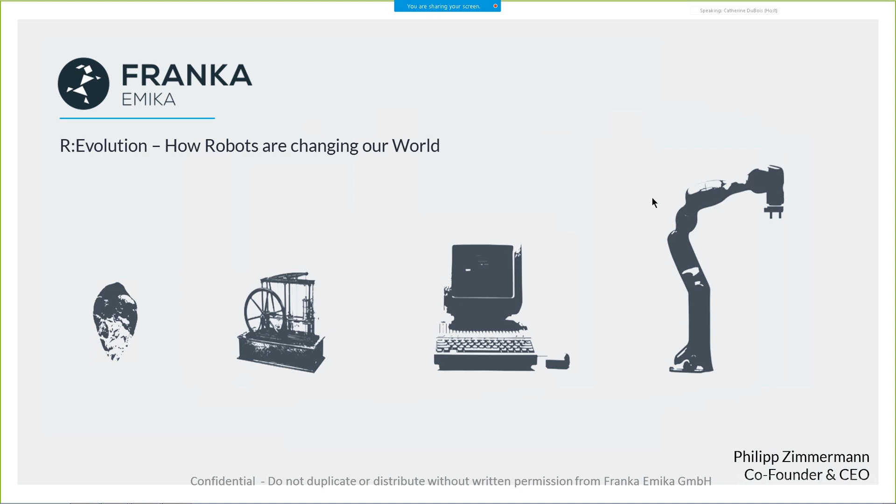And where it's going to, or at least from our point of view. To give the big picture, I like to introduce with this slide, one you've probably seen before in different presentations: mankind has always described the times in our history through the tools we've been using, starting at the Stone Age, where we used the stone pick to enhance and be more powerful and creative, and so on.

Going through the different industrial revolutions, we strongly believe that we've already entered the age of robotics. The message is that the robot should be seen as a tool to enhance and support us, rather than to replace us or be dangerous. We see the robot as a multi-power tool, so to speak, that we can use to be more powerful, to create things, art, tools, and so on.

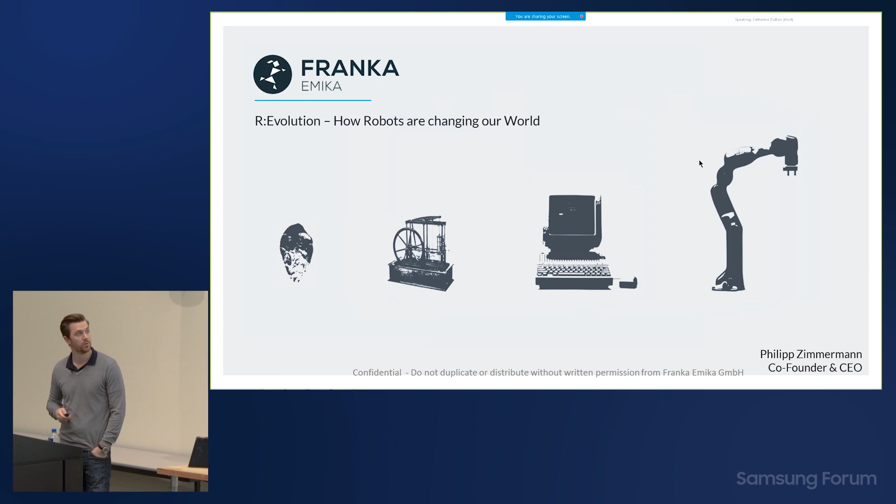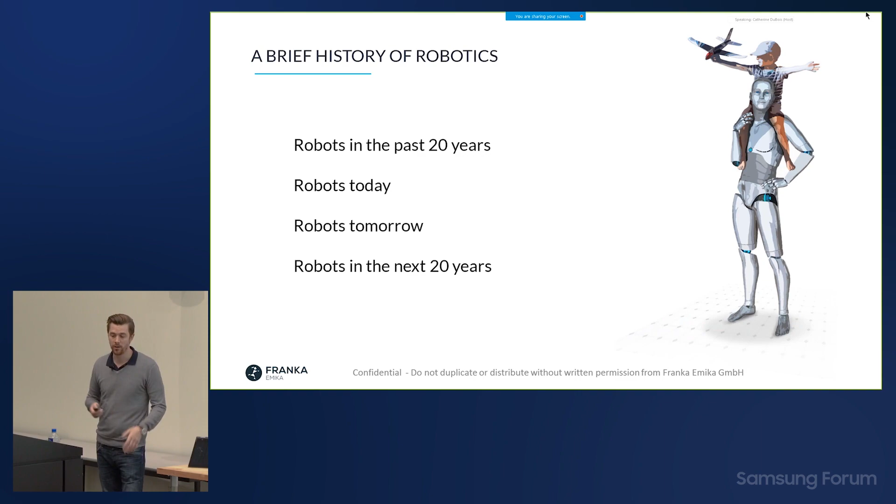So with that being said, a brief summary of what I'm going to talk about. I'll show you where robotics is coming from, what's been happening over the last years. Robots have been around for roughly 20 years, even though a lot of people haven't really seen them because they're hidden behind safety cages in big factories. Then what robots are today, where it's going towards tomorrow in the short-term, and then long-term where our goals are and where we think robots are going in the future.

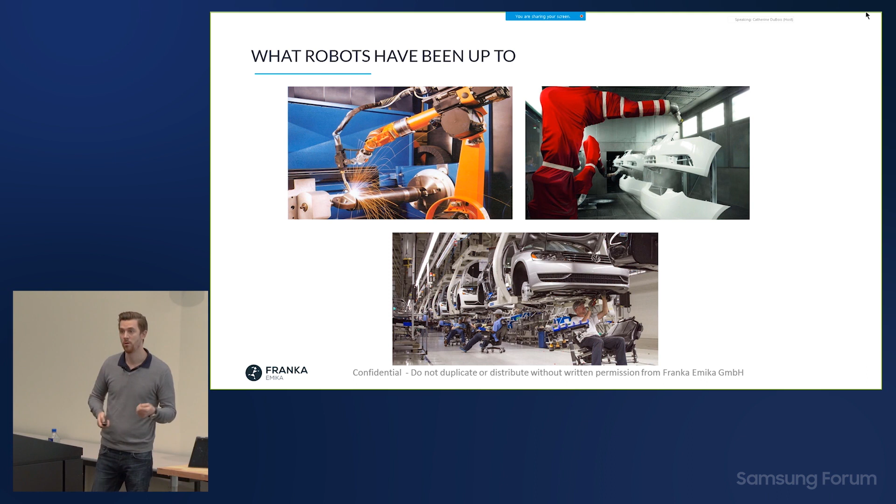So in the past, robots have really been around for 20 years, but what have they been up to? Mainly welding tasks, painting, or lifting heavy cars, stuff like that, mostly in automotive. A picture like this is what you typically see when you look into an automotive factory: lots of robots, safety fences, no humans in the areas where the robots work, and that's it.

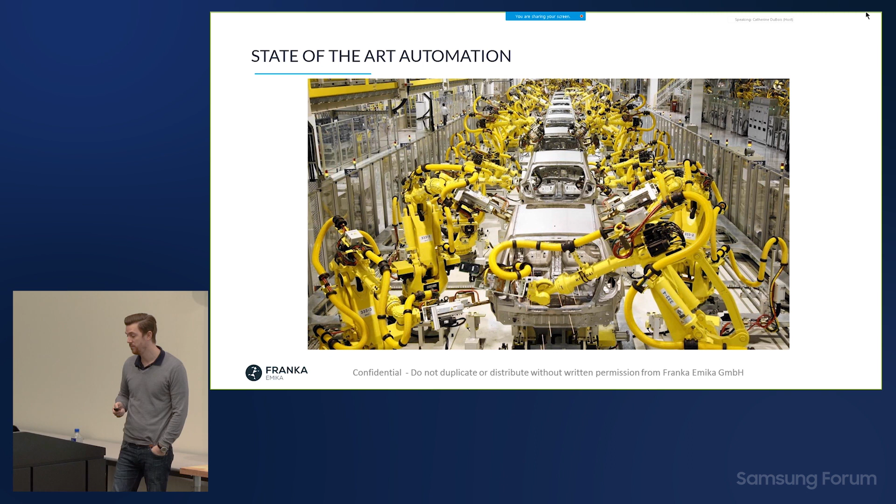The reason for that is because they're dangerous, of course. They will hurt you when you come close, so you need to protect yourself from them. And the tasks are very limited—even though we think our automobiles are mostly manufactured by robots, that's not true. Only maybe 20-30% of tasks in automotive are automated via robots, the rest is still manual labor. But these are the pictures that we see.

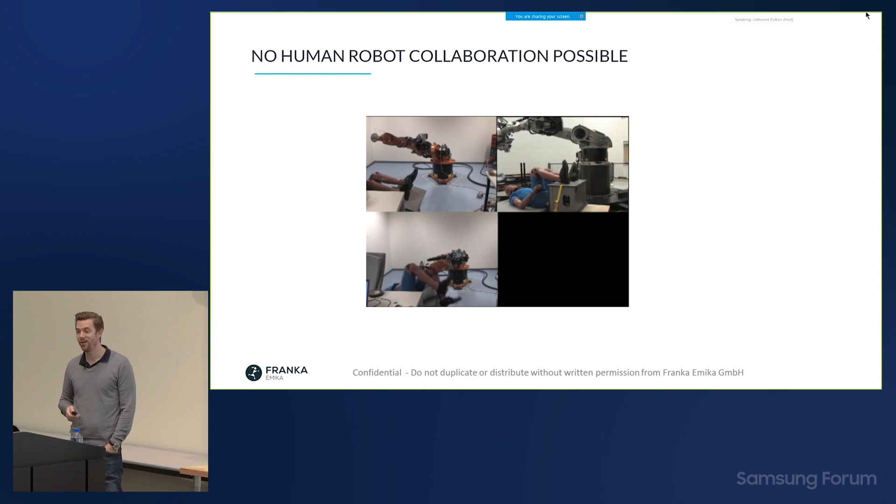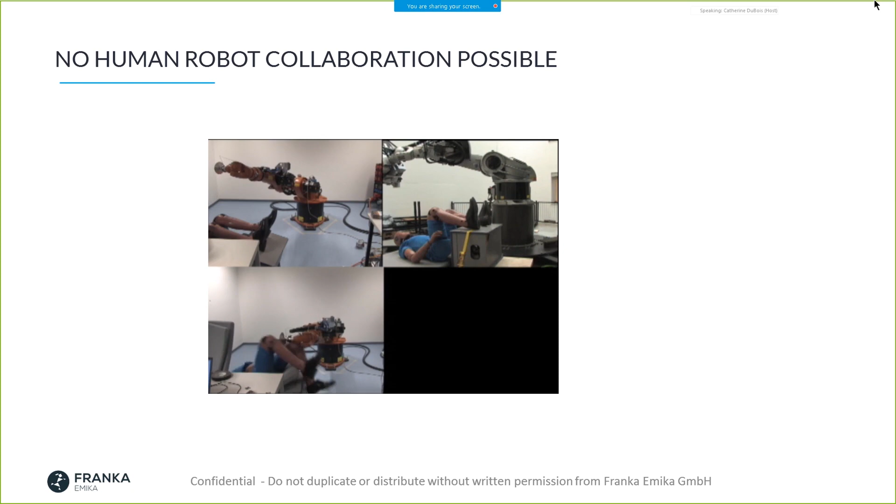Robots are dangerous, right? That's why we need safety fences, because even if we put a sensor on an industrial robot, there's no chance of survival, or at least no chance of avoiding pain. So for a long time, everybody in the world agreed robots are dangerous, period. There was no research behind that statement, it was just a fact.

Until one day, a young professor in Germany stood up and said, well, you're all wrong. Robots can be safe, and I'm going to prove it to you. He started research in this area, and we see here early videos from roughly 15 years ago, where you see a robot moving quite fast, but as soon as it detects a collision, it reacts and becomes compliant and soft.

These videos made it around the world. The whole research community screamed and said, how can you do this? This is dangerous. But it worked, and it got quite a lot of fame. People started understanding, okay, wait, maybe there's actually a way—maybe robots and humans can actually work together. Maybe robots aren't dangerous per se.

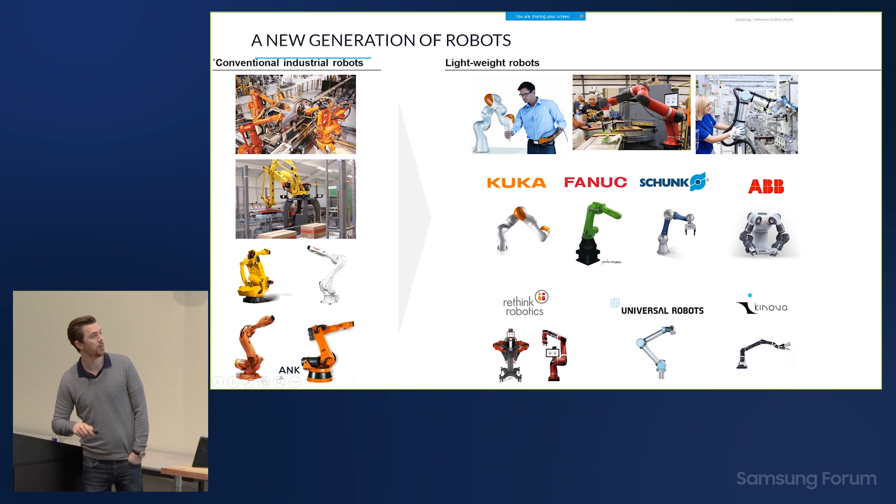Rethink Robotics, also quite successful, started solving the problem of safety, meaning once it collides with a human, it will stop. So it protects you as a human — you can work next to it and be safe. However, that's not the answer for all the problems.

If we look at robots today that we can buy for homes, those are the robots we typically see, or that's how they look. So they can tell you how you feel, or what you want to do, how the weather is tomorrow, or they can vacuum.

I don't really know what Pepper does, but it can wave and show you the way to the bathroom, or deliver things to your hotel room. But what do they all have in common? They have no arms. This robot has arms, but they're not really doing anything — they can't give you a bottle of water, they can just show you or wave to you.

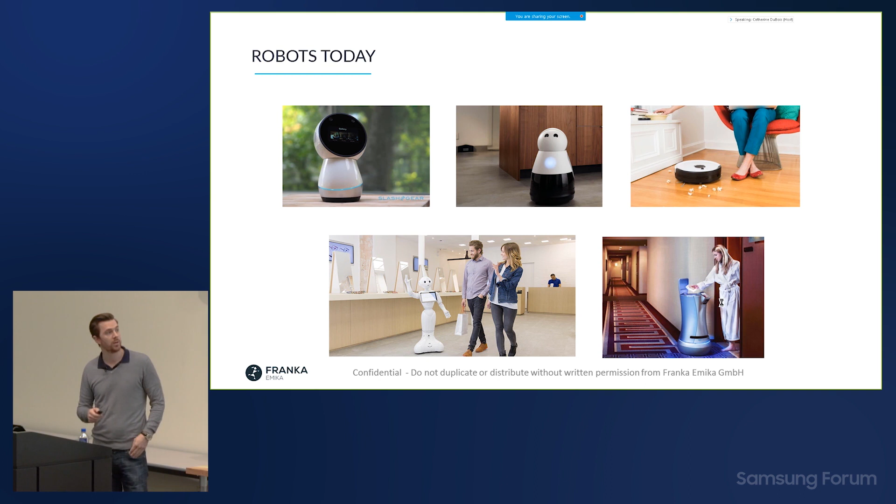And even this robot — it's a really nice robot, operational in a lot of hotels, so it will bring you your room service basically — the problem is, it can't even push the elevator button. So most hotels have elevators, and it needs to be integrated via software, which is expensive, and not all elevators are modern enough that you can do that. It would be much easier to give it an arm to press the elevator button, but apparently that's not so simple.

However, all the forecasts say big numbers, especially in the collaborative robot market. Looking at the numbers, in 2015 most robots were being sold in automotive, but over the next 10 years automotive is relatively small compared to all the other industries. That makes sense because other industries like electronics are much bigger than automotive, and hardly automated yet — people think once they have safe robots, they can sell many more.

But why hasn't that happened yet? Safe robots have been around for 5 to 10 years, but these numbers haven't been reached yet. So what is holding robots back today? Those are basically the reasons.

Besides being safe, which is obviously necessary most of all, robots are expensive. So especially for smaller companies, you really need to think hard whether you can afford a robot.

They're hardly usable, so people can't work alongside the robot. People working in the factory don't know how to operate the robot working next to it, so you need to train or hire new personnel for your company.

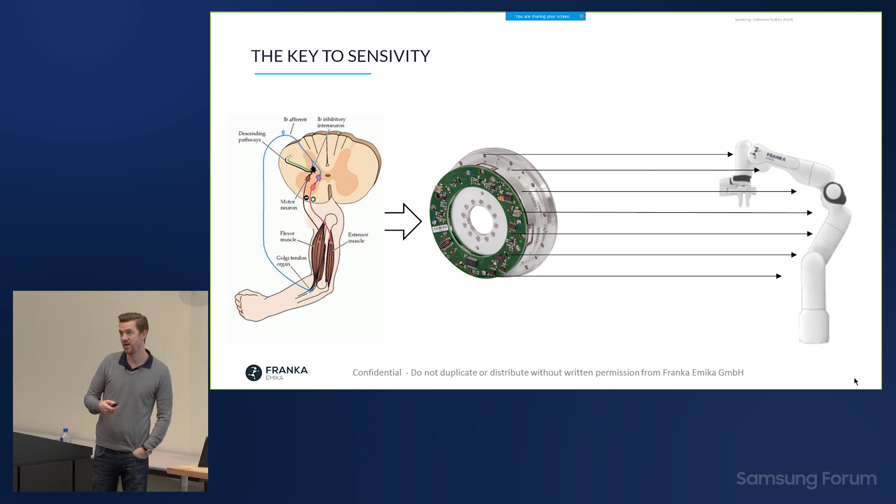That's similar to what we have inbuilt, and because it's highly integrated, the reaction time is really, really fast. We have, as humans, automatic reactions - as soon as I hit something, I can grasp it or retract. All this electronics are already in the joint itself, giving the robot a really fast reaction, making it safe enough to be around humans. Basically the requirement is you need to react faster than a human. We have about 50 milliseconds reaction time, meaning in this 50 milliseconds I'm at harm because I can't protect myself. After 50 milliseconds I'm fine because I can react. Until then, the robot needs to protect me.

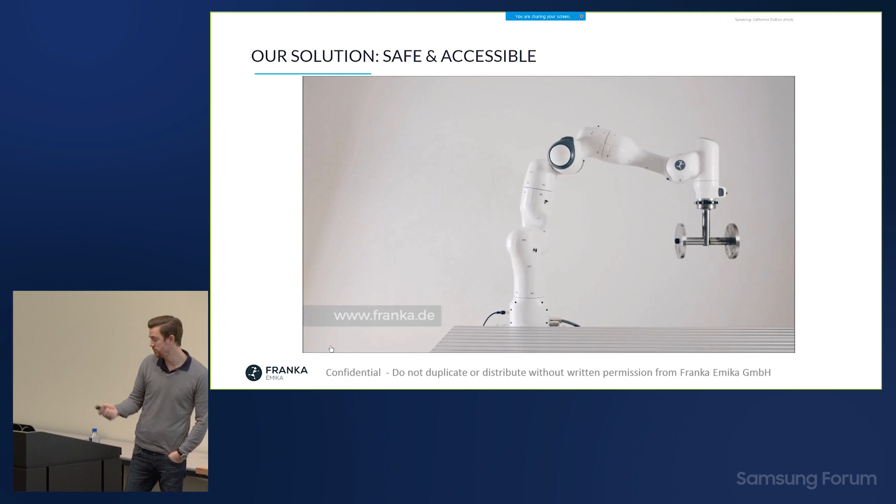So what we came up with is our robot Franka. Franka is a 7 degree of freedom robot, with a workspace very similar to a human arm, and it's as sensitive as it can be. I will demonstrate it, and I'll also invite you later to come to the front and feel it yourself to see how sensitive it is.

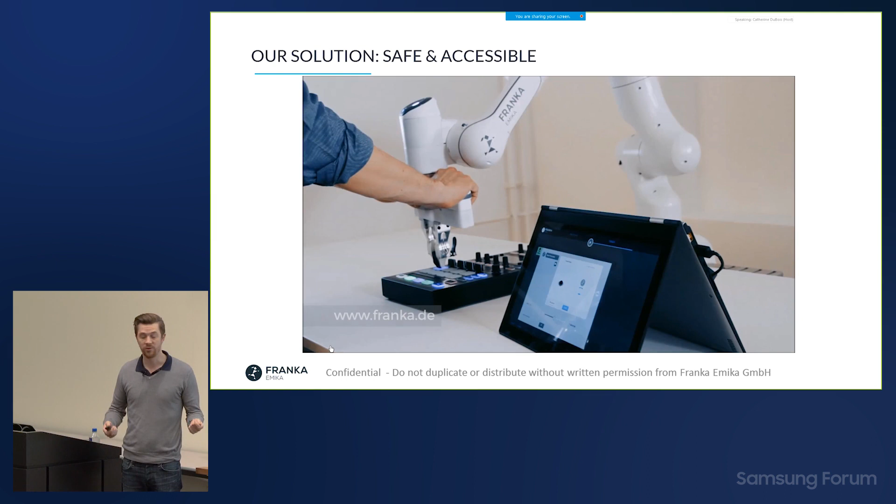The other big problem I mentioned is programming. So how can we solve that? Our approach was app-based programming - anyone can click a few apps together, like we do on our smartphones, and program a robot. And this behavior allows it to actually do assembly tasks.

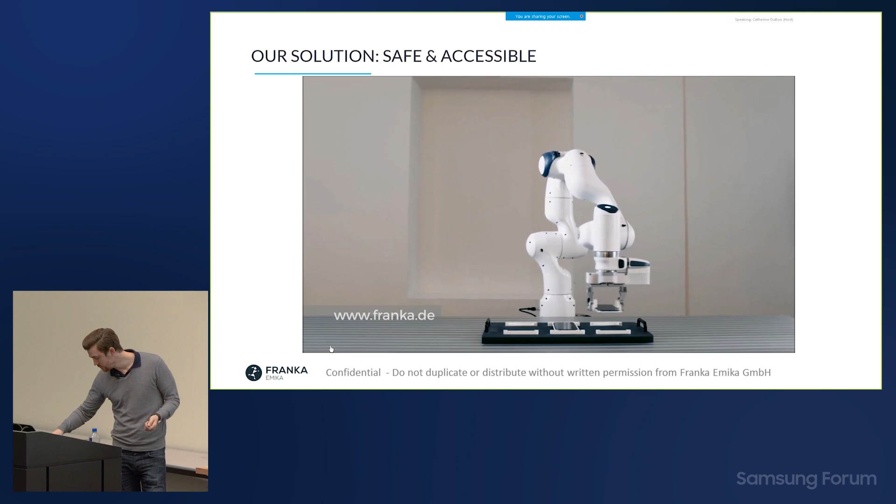So the story being told in the video here is actually the engineer programming two robots to build itself. Okay, I'll wait.

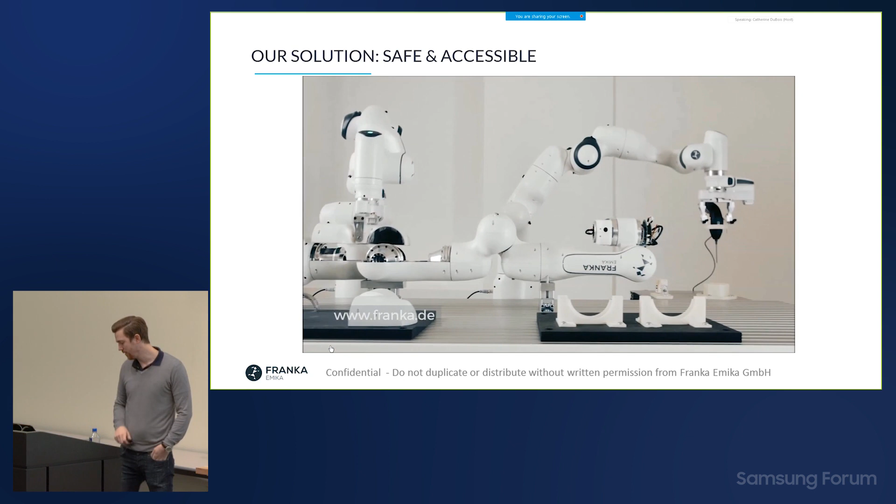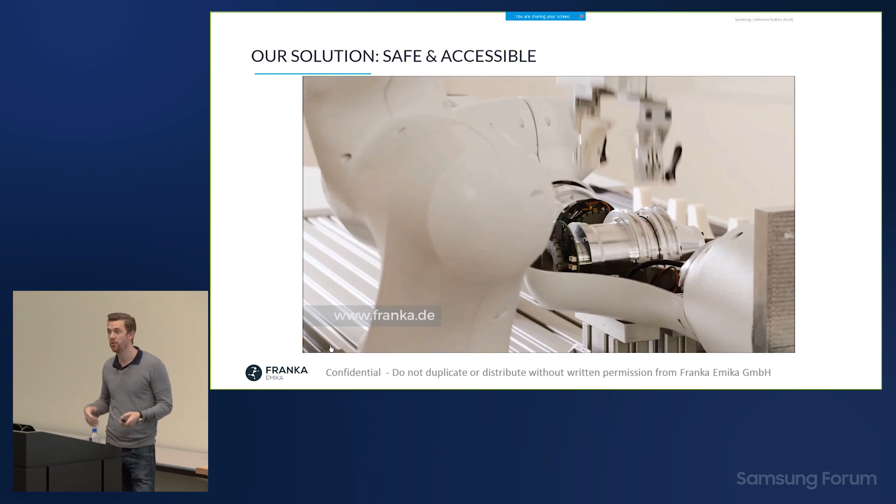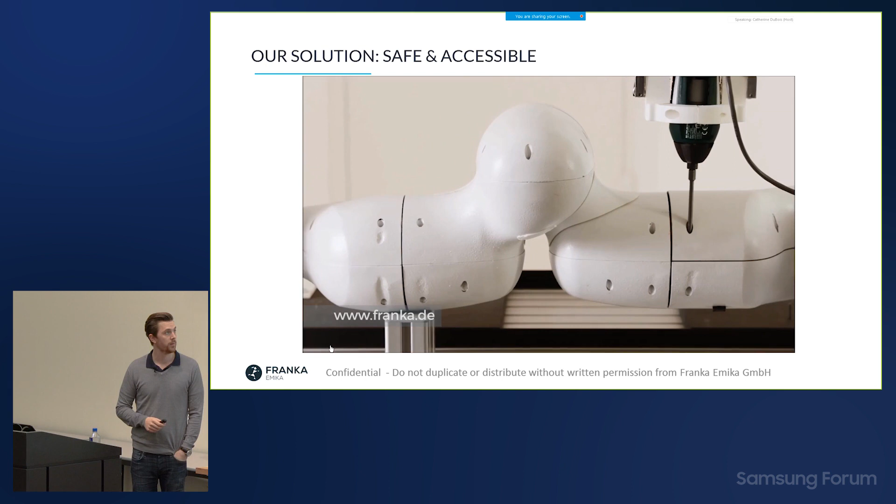So the story here is that the engineer programs two robots to build itself, to assemble itself. And that's actually not a marketing gag, that's our own production. Our production is in Germany, we're a German-based company, and the production looks like that: robots assembling robots. It would be a joke if we wouldn't do it because we claim that's the first robot to do assembly, so why wouldn't we use it in our own assembly lines?

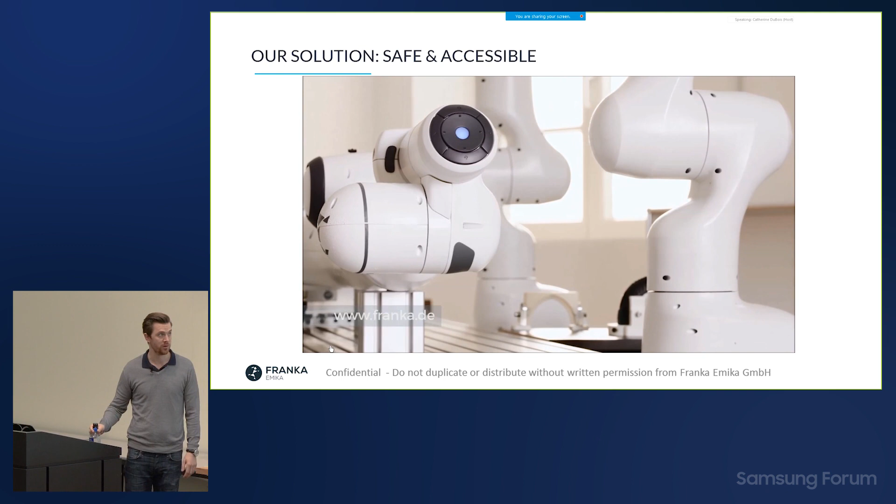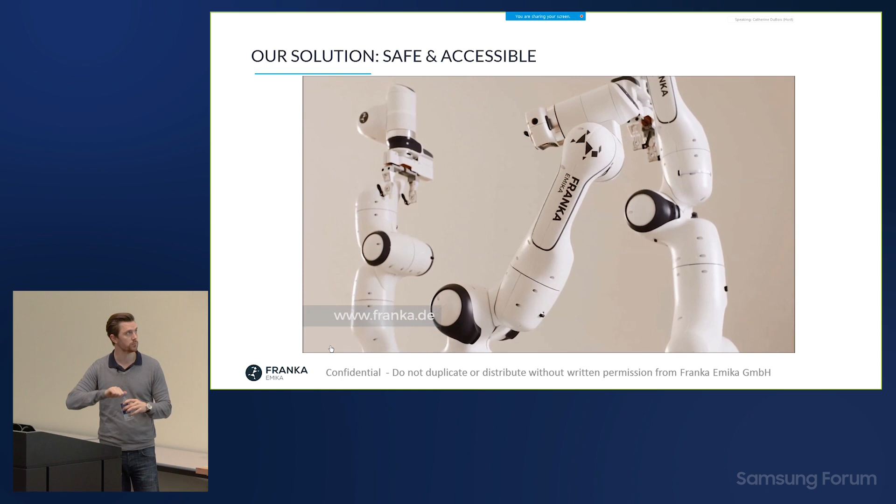The next thing is scalability. Programming one robot is fine, but you want to program hundreds and thousands of robots, maybe doing the same or similar tasks. So our robot is connected to the cloud. You program one robot and you can distribute it to as many robots as you want, no matter where they are in the world. And you instantaneously have the exact same robot program and thus the exact same quality of production, no matter where you are.

Additionally, of course, you have all the data in the cloud as well. So in total, you have a robot that is easy to program, flexible, and reprogrammable. It has an agile workspace like a human arm, and it's connected to the cloud. So you can set it up within minutes rather than months, and you can program a thousand robots at a time, no matter where they are in the world. And being in the cloud, obviously you have all the data in the cloud.

You can put any additional intelligence like artificial intelligence on top of it. So you can let them learn from each other. You can do predictive maintenance. You can make them optimize each other, all these things.

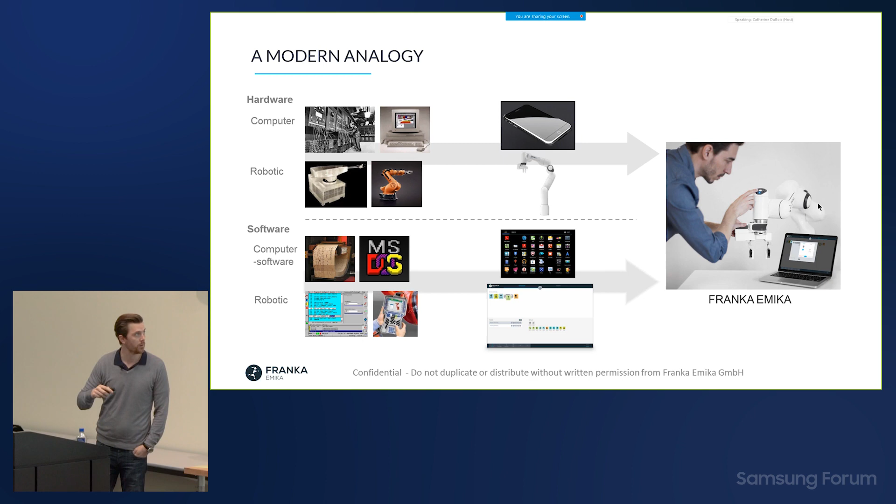Maybe the best modern analogy that we could come up with is the development we had in computers. The big old machines, then eventually we had the PC, and now we have the iPhone. Everyone has a high-end computer in their pockets, or a smartphone, I should say. So that's what happened to the robots: the first robot, then the classical industrial robots, now having really soft and sensitive, intelligent robots. And the programming, from having these punch cards, to better, easier programming, to really app-based programming we have nowadays.

So robot programming hasn't really changed. This is actually still how you program robots nowadays. Well, this is how you will program in the future.

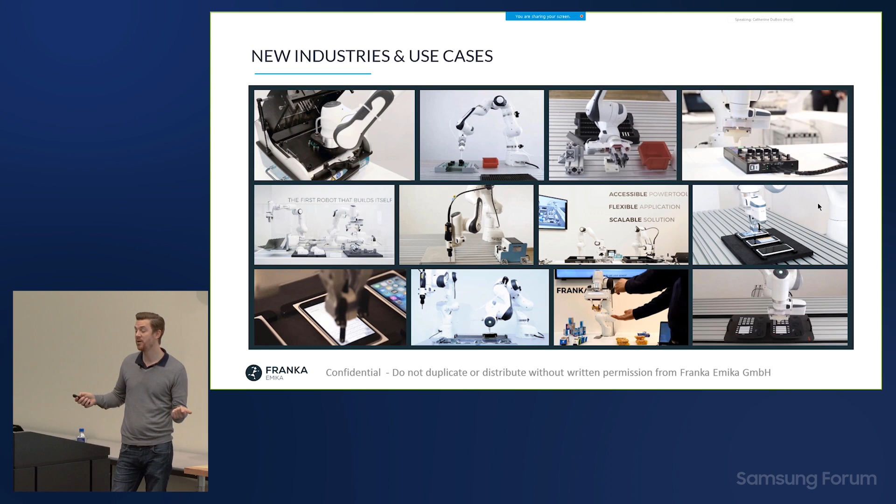And this, of course, opens up whole new industries and use cases. So from being very limited, mostly automotive, doing welding, painting, all these things, you can imagine it opens up to basically anything in industry, but also at home. Electronic markets, one of the biggest markets in the world, hardly automated. That's why it's all pushed to low labor countries with low manual labor costs. Well, these can be automated now.

Small and big companies can automate, it doesn't really matter. And the idea, what makes it really powerful, is that we're giving it as a platform technology. I use the smartphone as an example because I said it's app-based programming, while we open up the platform and invite everybody to contribute and write their own apps. You can write your own apps, push them to our app store, and distribute them through the app store, making the ecosystem more powerful and enabling more and more people to use robots. Not only big companies, but also small companies, and even private people at home. So think about the possibilities of that.

Brings me to my favorite slide of all. I'm German, and I love bread, we love our bread. When I was young, we would go to the bakery store on the weekends, and there would be fresh baked bread, and it would smell good, and you could choose what smells the best and what looks the best. And that has kind of vanished. Over the last 10, 20 years, more and more bakery chains have popped up everywhere. You can buy your bread at the gas station, and it's not the same.

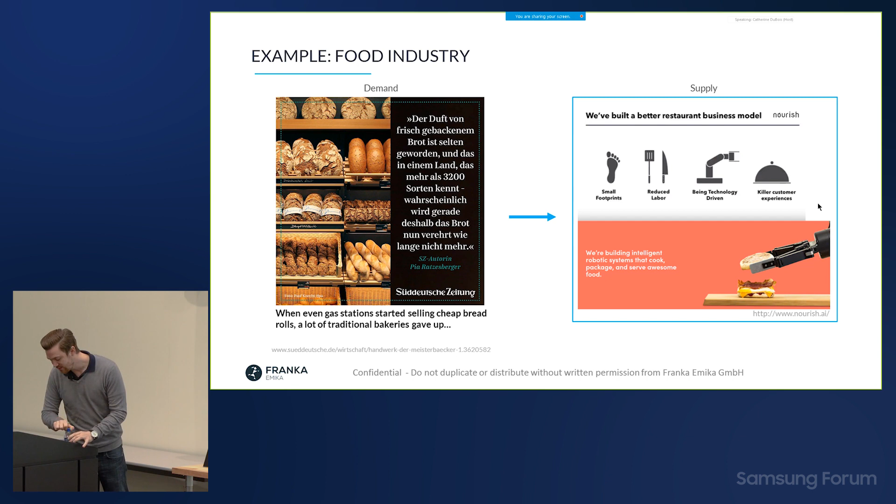And the good thing is that already a lot of startups are following this way as well. There's one startup here in the valley called Nourish. They want to be the biggest fast food supplier, but there's also Cafe X, for example, in San Francisco, doing robotic cafe. So companies realize that the need is there.

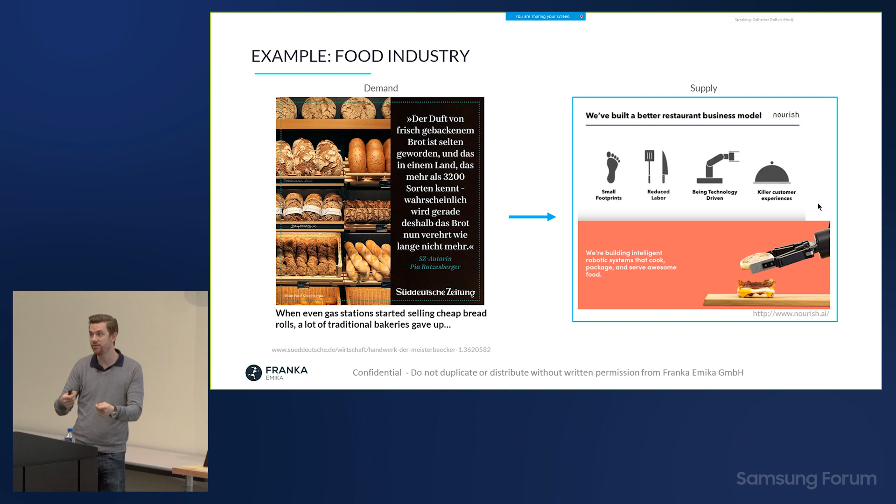So Nourish, they want to do fresh baked food out of the box, order it via app. But what they are missing is the platform technology, right? A technology that is cost-effective, affordable, easy programmable, and actually capable of doing what is needed to be done. So this is just one example out of many, maybe not the most technical example, but my favorite example. That's why I keep bringing it up.

And with that in mind, imagine where it's going. So of course, the industrial version is the first version that we bring into market, and that's where robots already are and coming more and more.

But we want robots in our homes. You can buy robots for your homes, but they're just not capable of a lot of things. Imagine what could be possible if you have actually a robot with an arm that can give you a glass of water, put the dishes into the dishwasher for you, or fold the laundry for you while you play badminton in the garden.

So all these things are possible, and I want to give you a short outlook into the future of what I believe the future looks like. This is a project that we're working on, and that's where actually our heart is.

So in the south of Germany, south of Munich as well, there's a city called Garmisch. It's a very pretty, magical little place, with a very old population. A few years back, there was a very wealthy industrial couple, and they passed away, and they gave quite a lot of money to this little city with the goal of making life better for the growing elderly population. And luckily we got funds for a project that we're doing there now.

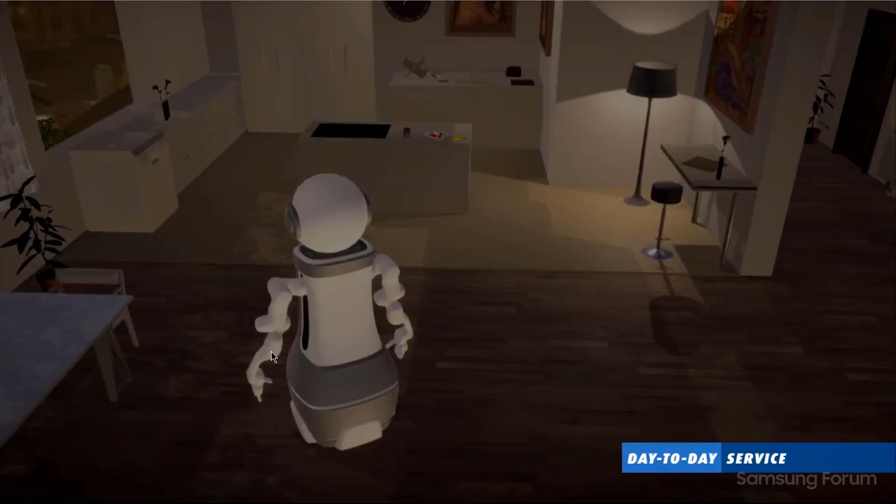It's in Bavaria after all.

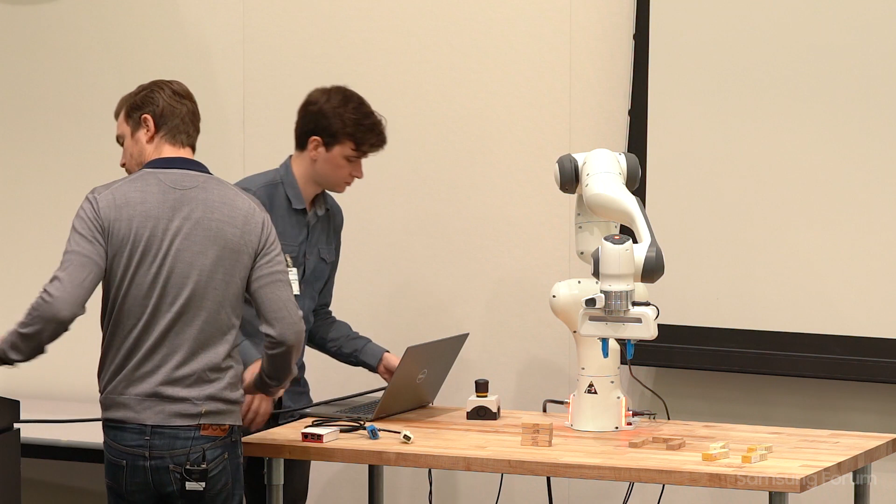So to give you maybe a demonstration of how sensitive it is - now it's just moving around, and maybe I'm just standing here and I collide. You saw maybe it wasn't a hard collision, right? It was very soft. I can say maybe something is wrong, okay, and I give it a little push and it will continue.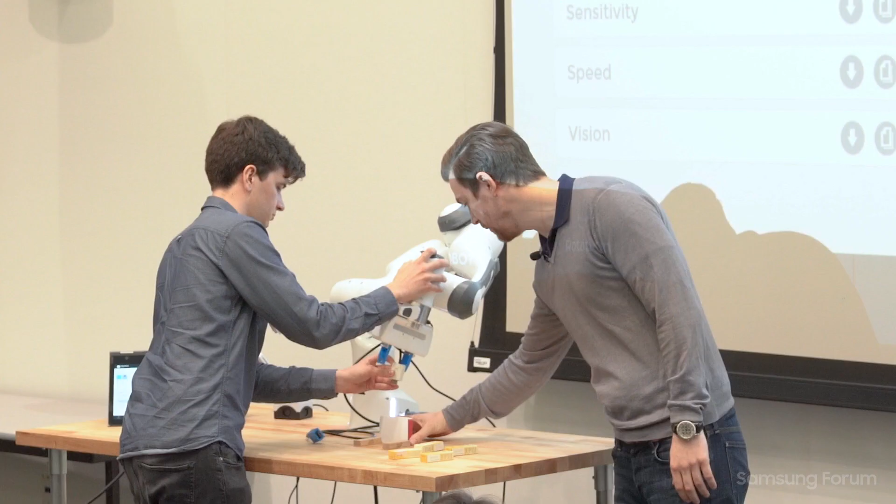And of course, in the real world, we can never be 100% precise. And even with this setup, it's a very prototypical setup, just put in here. It can never be precise. So it shouldn't be able to insert this unless it has a sense of touch and the right strategy to kind of wiggle it in there.

And of course, that would take weeks and months to program unless you have an app for it. So as you can see, he's actually programming it on stage live now. So the app asks Lucas to give it some positions that it needs to know, because actually it doesn't have a camera at this moment, or it's not using its camera.

And also what you see, there is no teach pendant. So all that Lucas is using is the pilot on top. You can either program the software directly through the computer or the iPhone or whatever it's using, or control the software through the pilot, enabling it once it's programmed to keep both hands on the robot at all time.

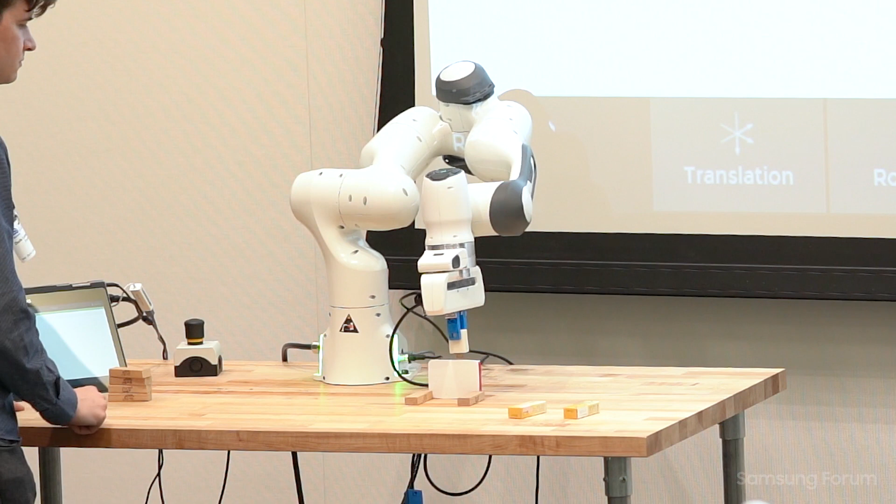Are you done already? Oh yeah, done already. So that was fast. I'm not sure how well you can see from afar.

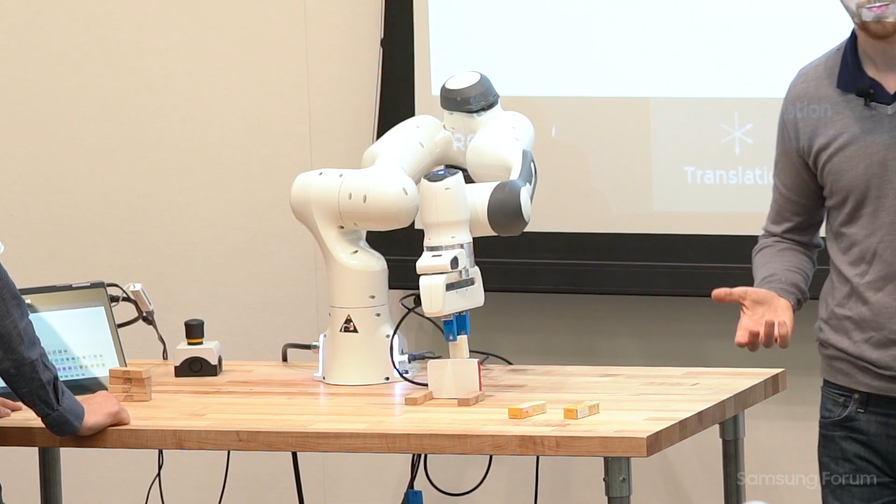So now we just programmed live on stage what usually would take you a month, even having the technology of the robot. So you can understand the leap or the big gap in technology. This means millions of people do this every day in the factories because you can't automate it today, not in a robust way.

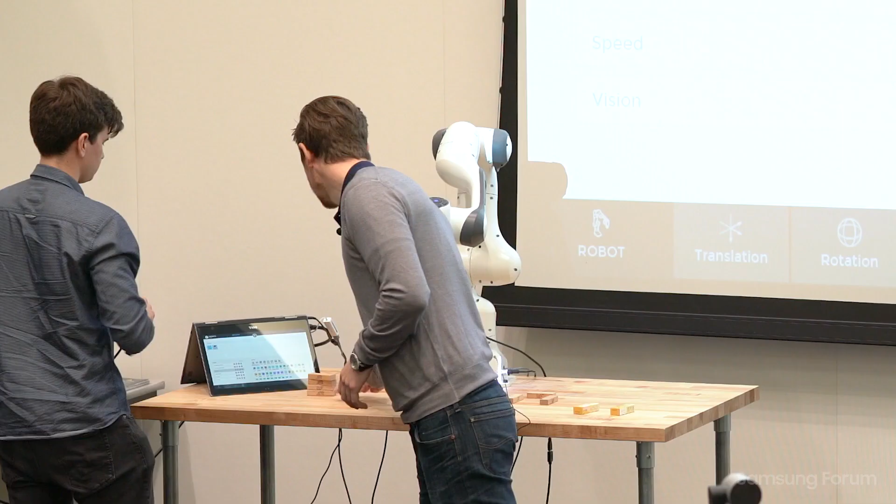So maybe this gives a good understanding of what's possible and what's coming. And of course, with the platform being open for people to participate, there's actually no boundaries, and I hope it will go into any different kind of field.